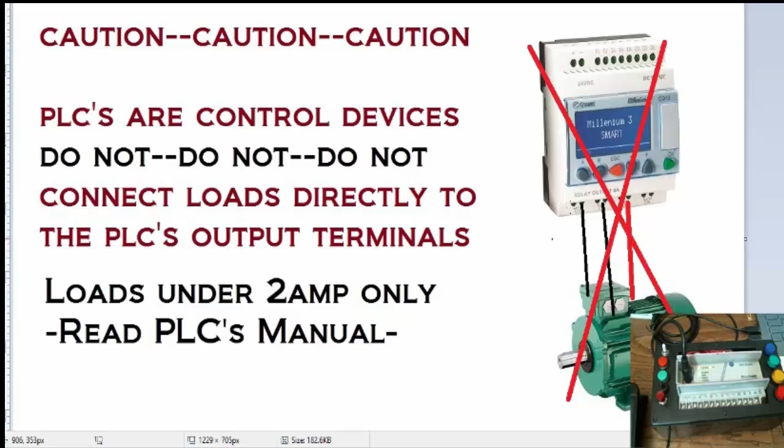This time we're looking at—actually, word of caution: never connect your control device or PLC to a big load. You're going to fry that. We've been saying that, and we'll continue to preach it. It's such an important concept.

Let me close this file so I can bring up the appropriate one. This is the forward and reverse example. In this particular diagram, there's a delay shown, but we're going to leave the delays for later, so ignore TR1 and TR2 on this one and just focus on the rest. We have a stop, forward, reverse, a motor, a seal for the motor on both, and the timer instructions, which we're going to ignore for now because I have another example to show timer applications. I just wanted to concentrate on this application, called forward and reverse operation.

This is the case for a machine that either has a single electrical motor able to rotate in both directions, or two motors—one that moves the machine in one direction and the other that moves it in the other direction.

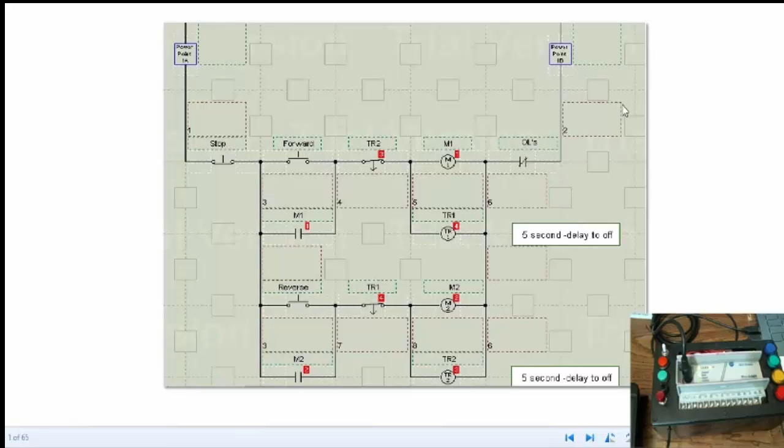I have the design already here, and this system uses 7 instructions: 3 physical inputs, which are the forward, the reverse, and the stop, which can be repeated. Then we have the forward output and the reverse output. Additionally, we have internal instructions: an examine-if-open, or normally closed, reverse output interlock, and forward output interlock, and of course the seal for the circuit.

If you recognize the upper part of this ladder diagram, it's basically a start-stop system, right? That's what it is. We've replicated the start-stop system twice, and we've added a safety feature to it.

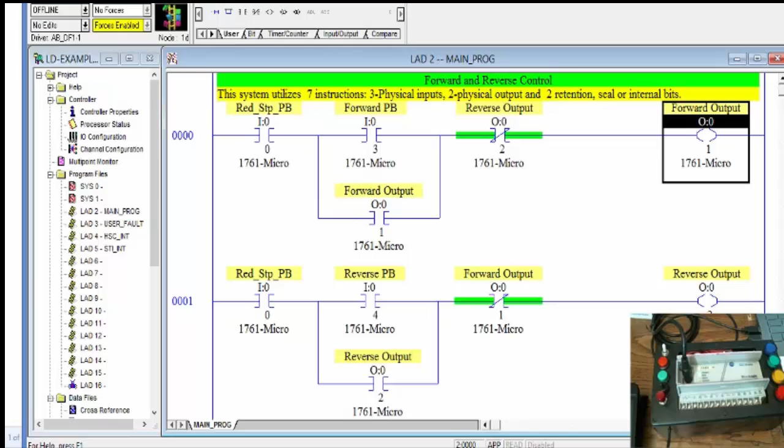Basically, anytime the forward output is running, you don't want this thing to run, right? That'd be equivalent to going forward in your car and suddenly putting it in reverse. Guess what happens? You're going to turn around, kill yourself, and you don't want to do that. So you put on the brakes and then go in reverse. This is the same concept right here.

Likewise, when I'm going in reverse, I want the reverse operation to run, but I don't want the forward reversal to happen at that time. In other words, you've got to stop one to do the other. That's what this circuit is all about—forward and reverse with an interlock system that prohibits one operation from happening while the other is happening. They both have to be independently actuated, or the system has to be stopped before you can run this.

So once again, there's the file verify and the project verify. You'll want to run that to make sure there are no errors—this one says verify has completed, no errors. That's how you diagnose these programs.

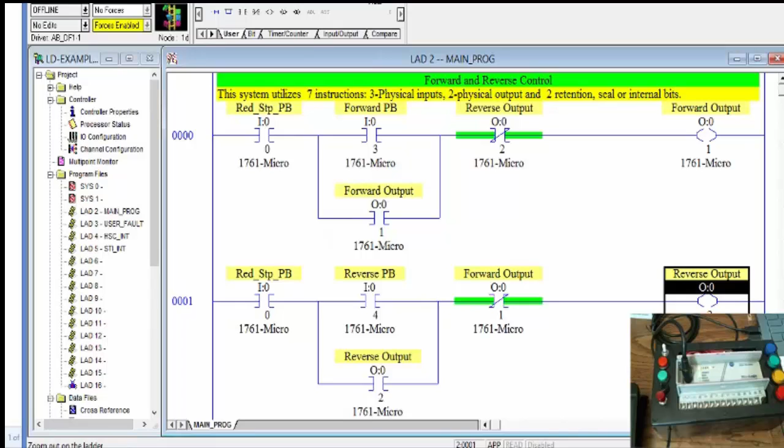I'm going to see if I can zoom this one so you can see the end of it. All right, here's our program. What I'm going to do is run this one.

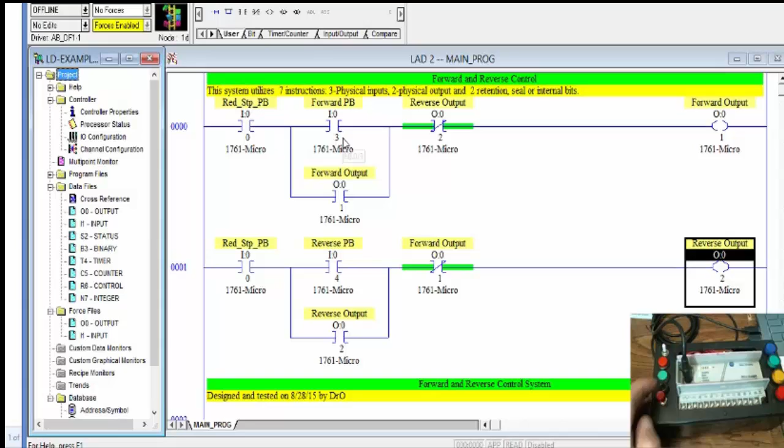Notice my input addresses: the red push button, which I already have here, and the green push button. In addition, I have input 4. Actually, let me back out—my input 0 is my push button, which serves both rungs. My forward is input 3, which is a 2-position switch connected to terminals input 3 and input 4.

So when it's selected on input 3, it's going to go forward. When it's selected on input port 4, it's going to go in reverse. But it cannot go in both directions. So let's go ahead and download it.

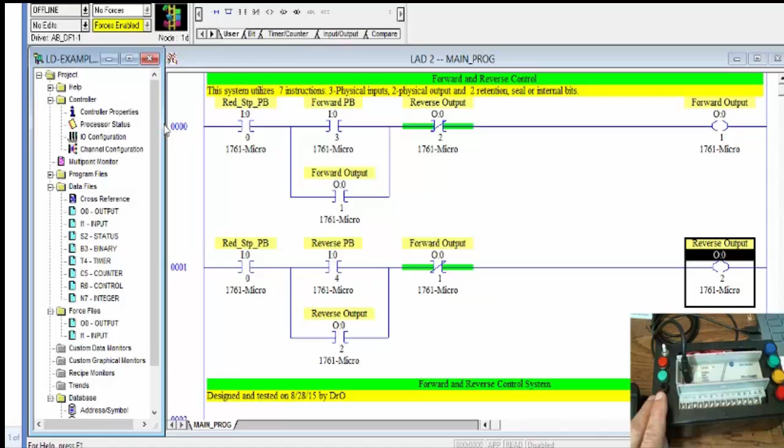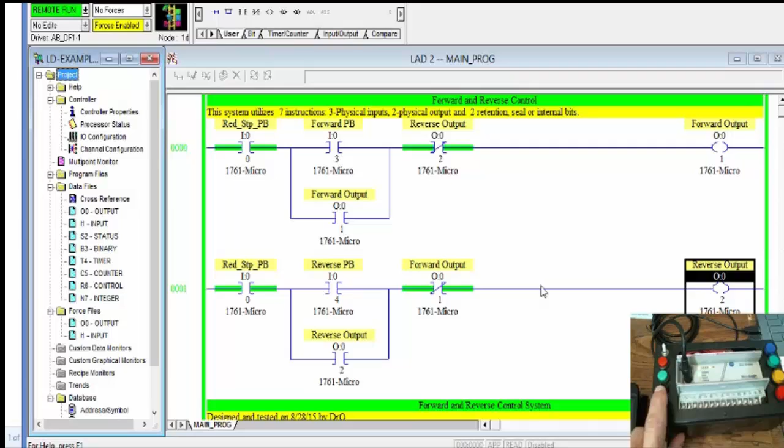All right, as we download it, just wait a second. We should be ready to run. Once again, I'm running my actual hardware. You may have to run your simulation software. I'm going to go forward by pressing this two-position switch, which has input 3 forward and input 4 reverse.

There's the forward. Now, if I actuate this to enable input 4, nothing happens, right? Which is exactly what you're expecting.

This system will keep running until it's stopped. So now it's stopped, I'm going to energize the reverse operation. There's reverse, and at that time nothing else should matter, right? Because that's the way you want it.

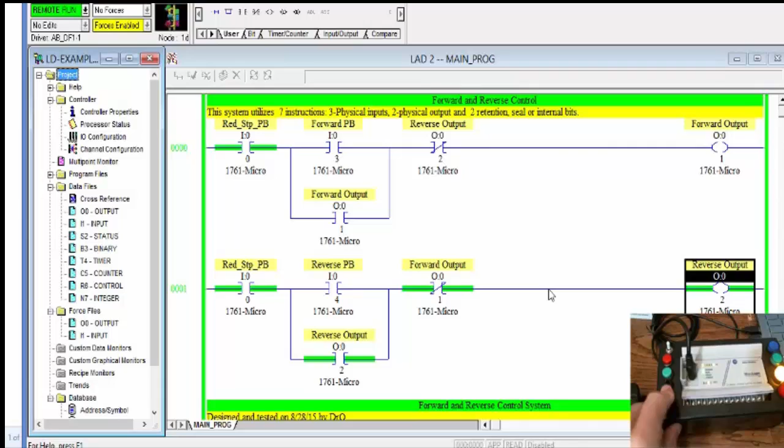You don't want this running back and forth without any precautions, so that means I have to stop it before I can do anything else. That is the forward and reverse operation as it's established on many traditional systems controls, where ladder logic and PLC applications are the solution.

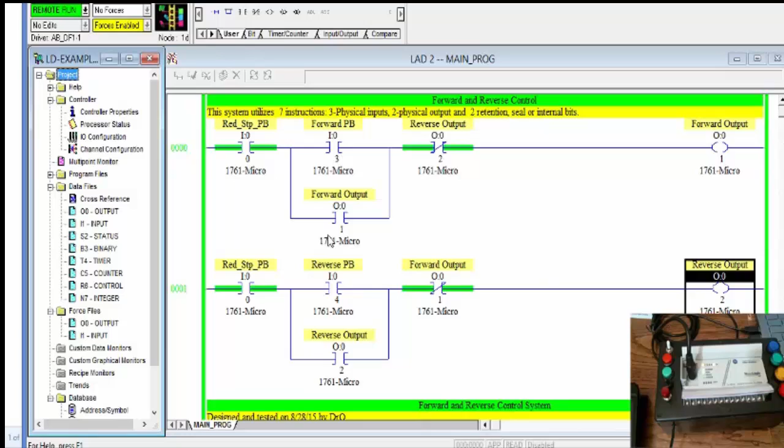All right, once again review, and if you want to mess with this, you can also modify your project so that you can do whatever you want.

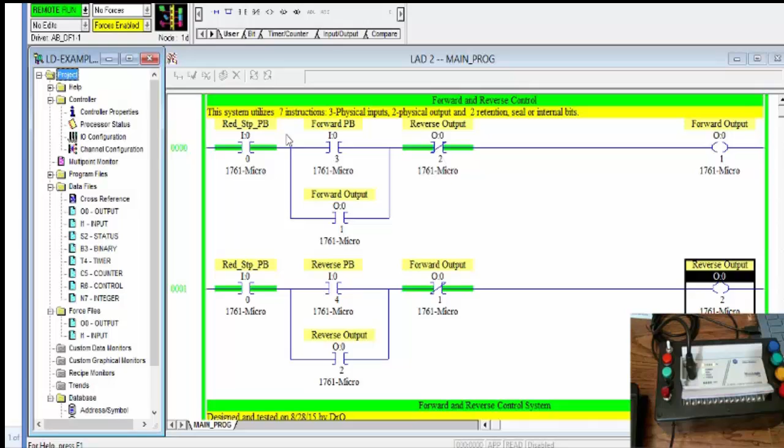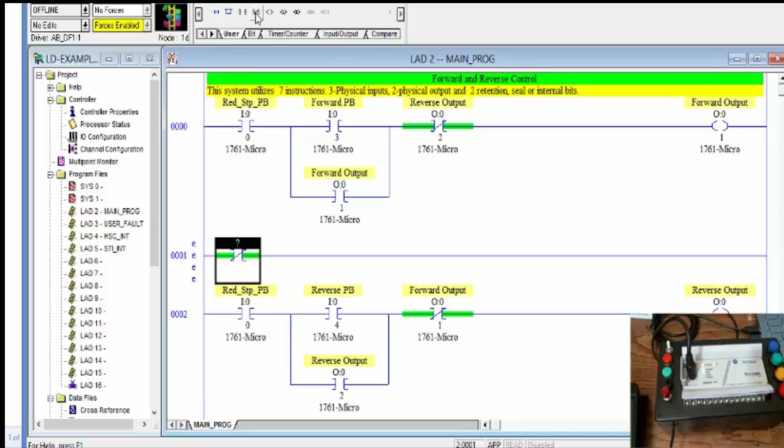For instance, just for the heck of it, I want to be able to add a line here to this program, and the line is going to go here. What I want to do is use a line that will energize a lamp while the system is de-energized. So I'm going to use that for input 3, or output 3 I should say.

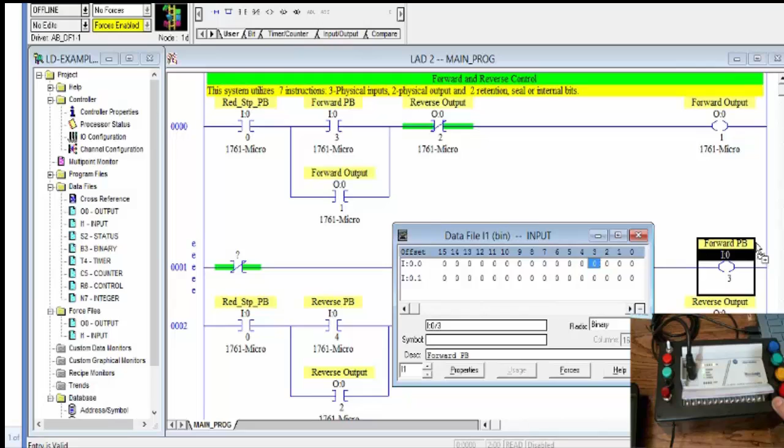So I'm modifying this project from its original. I'm going to use the input table, and because I know my red lamp is connected to input 3, I'll use that address, hold it down, bring it over, and I've modified it. Now what do I want here? Well, I want this to be on as nothing is happening.

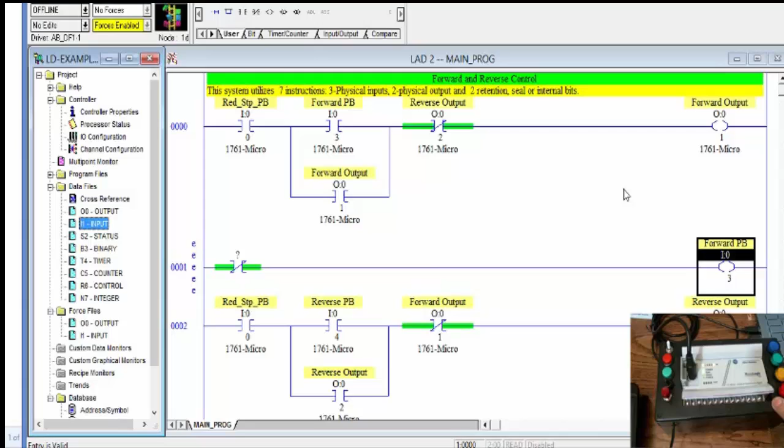So I can use any of the two output addresses to energize this. All right, so my options are - let's just check it out. What happens if we add this address to this one right here?

Let's go ahead and download it, okay, so you can see what's happening here. No errors. I'm going to proceed to do that.

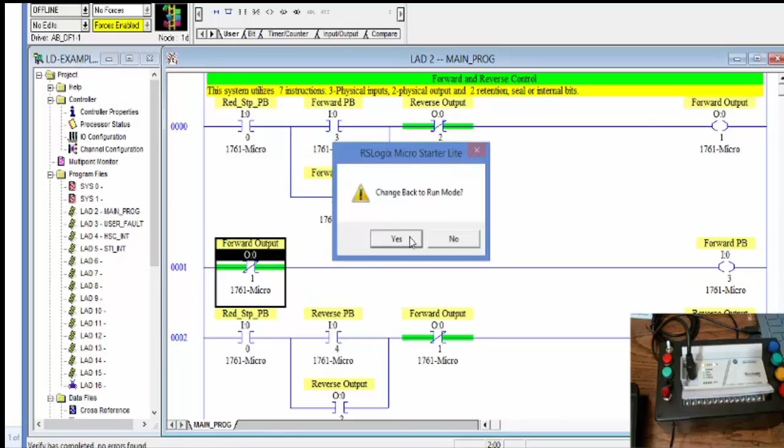And so as the system goes online, one light is already on, right? Oops, do you see the mistake that I made? I'm addressing this output with an input address, right? And those are things that the system will not catch. I've added an input address to an output energize instruction, and that's the reason why it's not going to work.

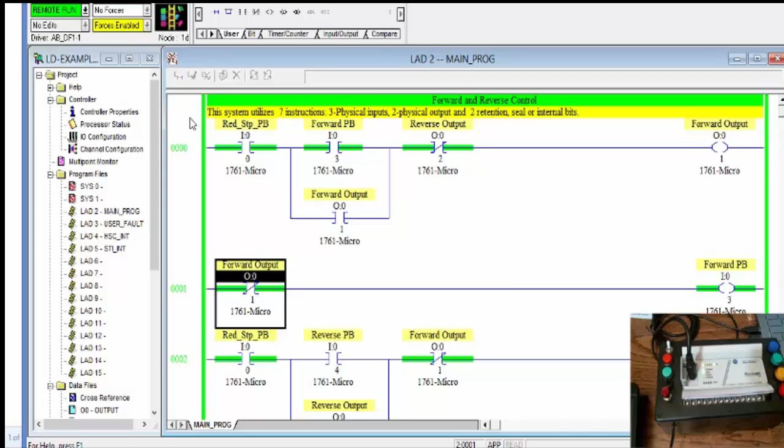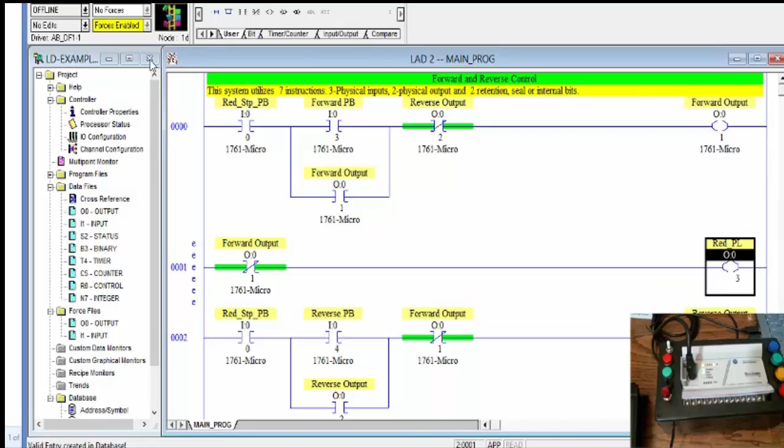So let's back out, and what I want to do is address that properly using the output table, and what I wanted there is actually output 3. So output 3 is what I want, and that output 3 I can edit, and this is going to be the red pilot light. Okay, so there's our system. I'm going to go ahead and download it, and everything should work as expected this time.

These examples are tremendous because that's what you'll find in industry.

As expected, our system is de-energized, which means this red light is on, indicating the system is de-energized. As I start the system forward, I expect that light will go out. And the system is going forward.

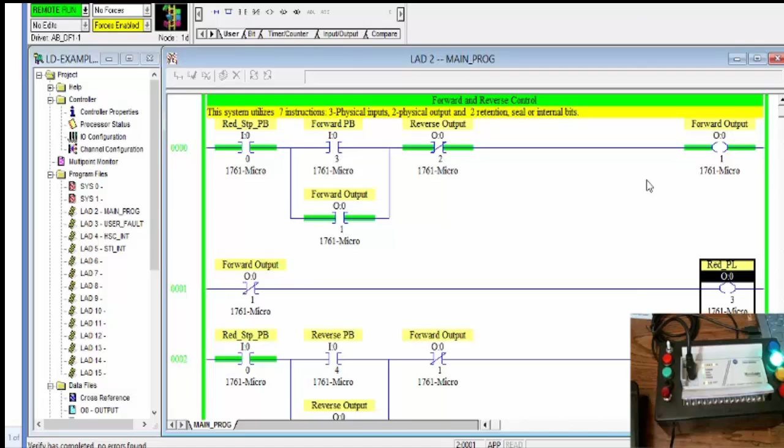Now, what are we missing here? Well, I'm going to stop the system. The light indicating the system off will be energized once again. But what happened when I energize the reverse position? The system is still on. So what will you do?

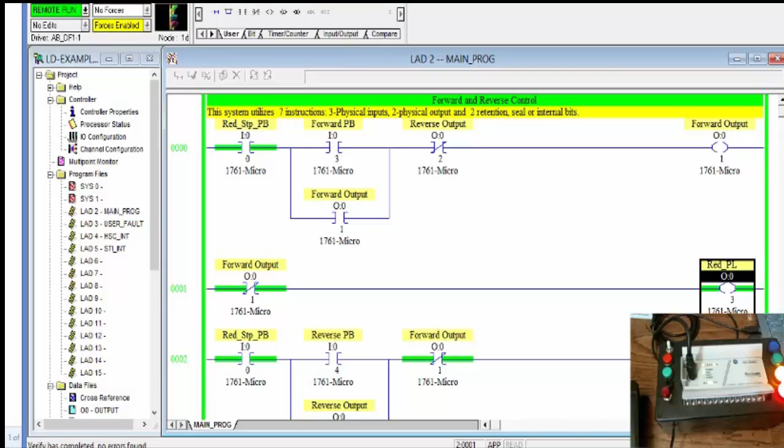This is a good example. So we're going to modify the circuit. I'm going to stop it first, and we're going to add one more instruction. This goes back to our digital logic.

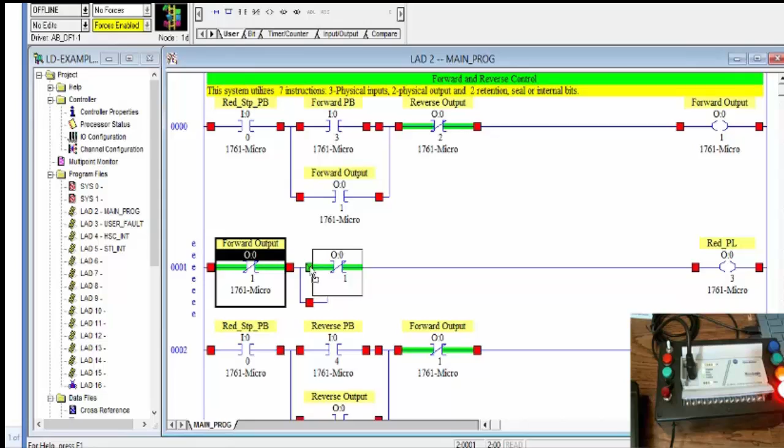I want a branch, right, that either this pilot light or this output energize will disable this light, or this output energize will disable the light. And so I'm going to take away the address of this one.

Now I have really a system going on. And you recognize here, what do we have here? This is an OR instruction. What the system's saying is, if this output is energized, I want the light to be de-energized. Or if this output is energized, I want also the light to be de-energized.

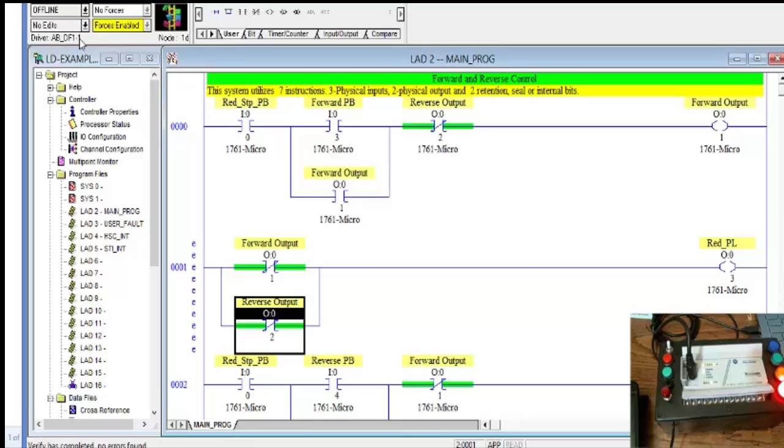Let's see if it works. If not, we're going to come back to the drawing board and modify that. We're just troubleshooting here, which is part of the skills you're supposed to get. There's one other possibility, actually more than one, that we could do with this design. So there's everything, and we probably have to do something better than what we have here.

So let's go forward. System is going on. Now the light's still going on here, right? And we don't want that. Do we? We don't want that. So something needs to change.

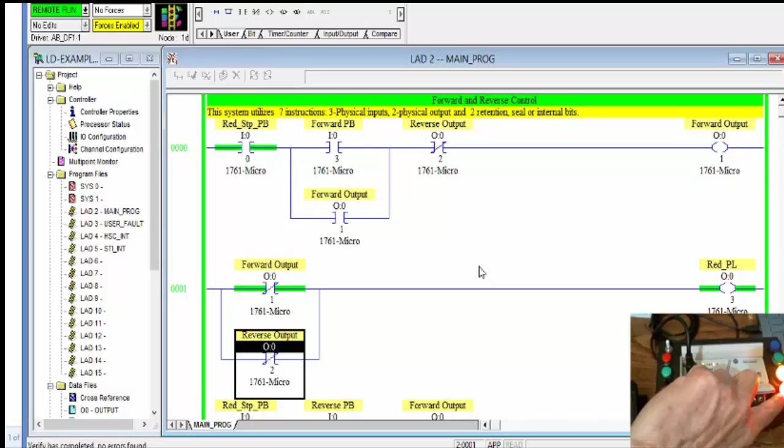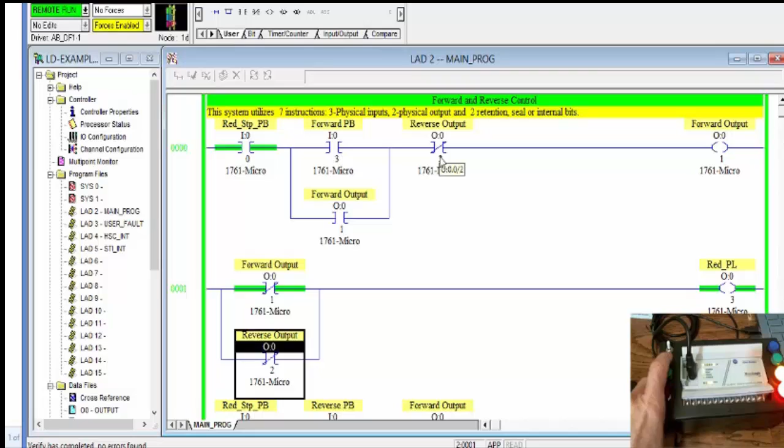Let's stop the system. I'm going to go in reverse, which still keeps the off-system light energized, but I don't want that. So we need to modify this, and essentially what we need to do is exactly what we have here. We need these two pilot lights to be in sync with our system.

Again, this is probably away from the original design, which it is, but we're just in the process of enhancing what we're doing. And what we've just done is add a feature that allows us to see when the system is off, when it's going forward, and when it's going reverse.

So let's give it a shot. That system is off. System is going forward, right? The red pilot light should be off. Nothing else should happen until I stop.

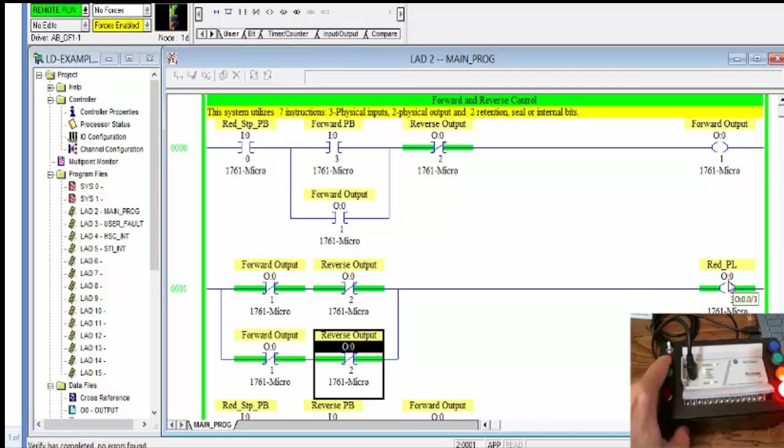Now I want the system to go in reverse, and system is reversed. Nothing else happened, right, until I stop it. At that time, the pilot light is on. So you may want to explore this design and do whatever you need to do.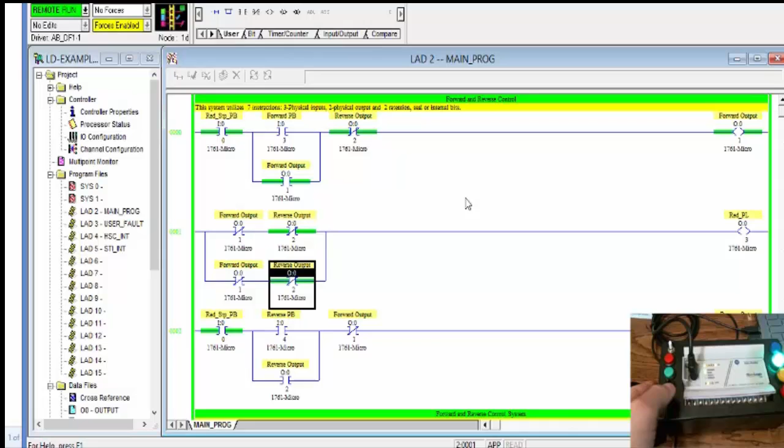Here it is one more time. Let's just give it a shot. System's off. System is energized. Oops, I need to stop it. Yeah, there we go, so reverse. Nothing happened, I have to stop it. Forward. Nothing happened, I have to stop it. And then system's off. So that's our design.

And we're going to stop here because our video is getting pretty big. But nice design nonetheless. And the idea here is to enable you to become a programmer, so you have to mess up with this design, test out your ideas, and then go from there.